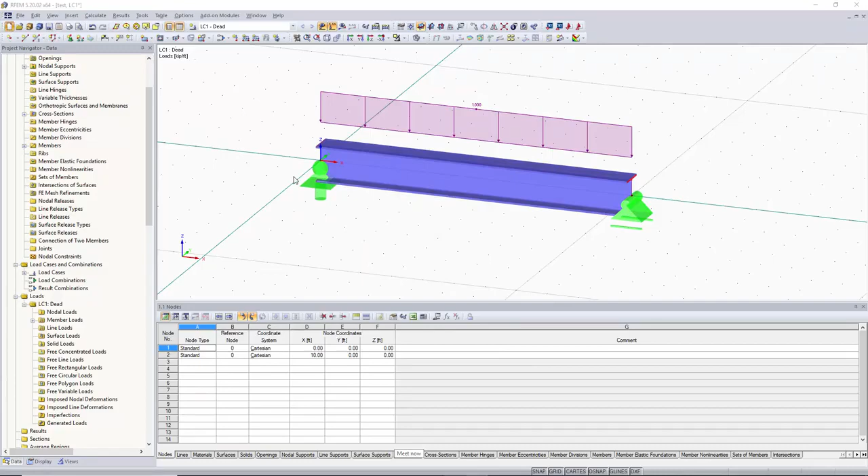To start off, we'll go up into the left hand corner and click on the New Model button. We'll name our model, and then we will click OK. The 7 things we need to determine when creating a new model are nodes, lines, supports, material, cross-section, loads, and then results.

So to start off, we can go up under Insert and go to Model Data and then go to Nodes. Under this drop-down box, we can go to Dialog Box. Within this dialog box, we can set our first node to the origin, which is 0, 0, 0, so we'll click OK. As you can see, our first node was placed.

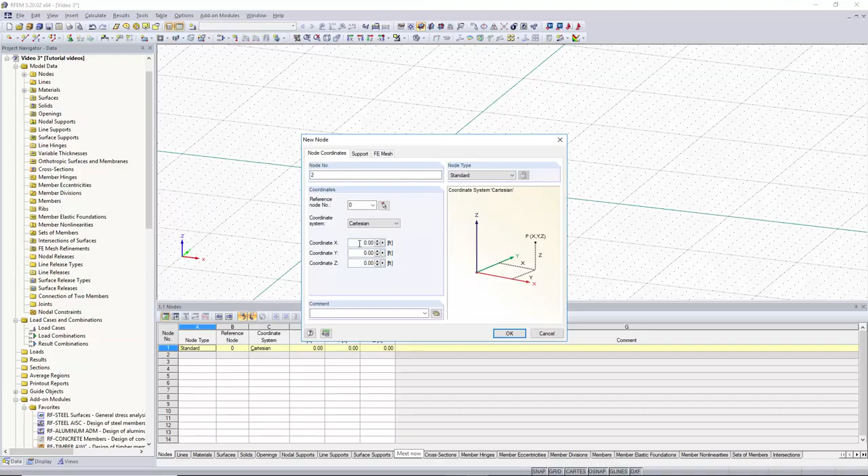We would like to place the next node 10 feet away from this node in the X direction, so we can go back up into Insert, go to Model Data, go to Nodes, and go to Dialog Box again. Then we can go to the coordinate X and input 10 feet. This will put a node in the positive X direction 10 feet away from our origin node.

Now that we have our nodes, we would like to place a line in between these nodes. We can go back up into Insert, go to Model Data, and then we can go to Lines. As you can see, there's a lot of different lines we can select from. For now, we're going to use a polyline, and we're going to click on Dialog Box.

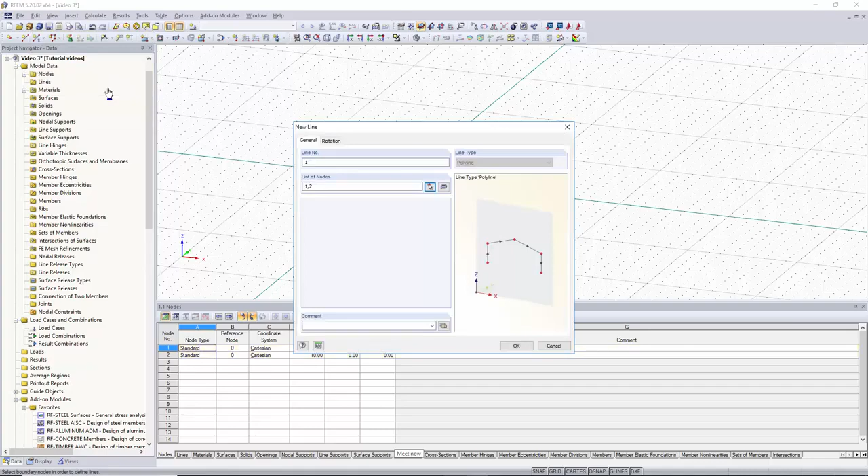Within this dialog box, we will select the nodes we would like to place the line in between. Within this list of nodes, we can either select our nodes graphically by clicking on them and then clicking OK in this box, or we can enter them manually. As you can see, our line was created between our two nodes after clicking OK.

Now that we have our line and nodes, we would like to create a material. As you can see in our project navigator under materials, we already have a material set, but it's blue, so it's not assigned to any certain cross section or member. We will keep steel A992 and move on to assigning a cross section.

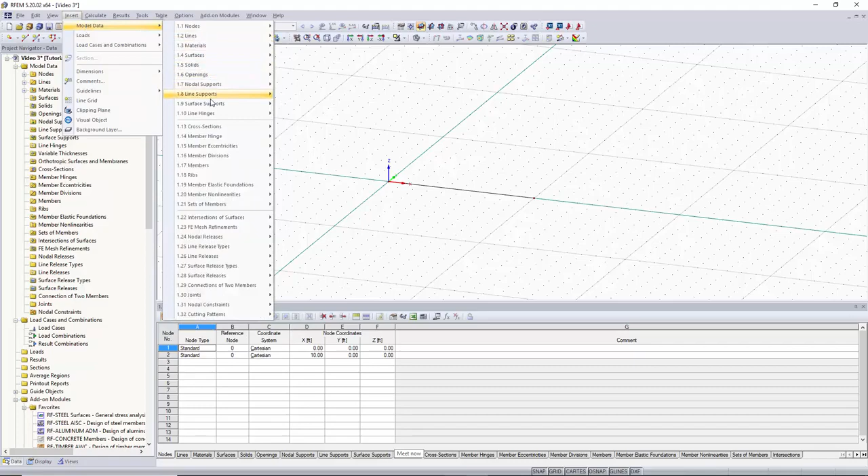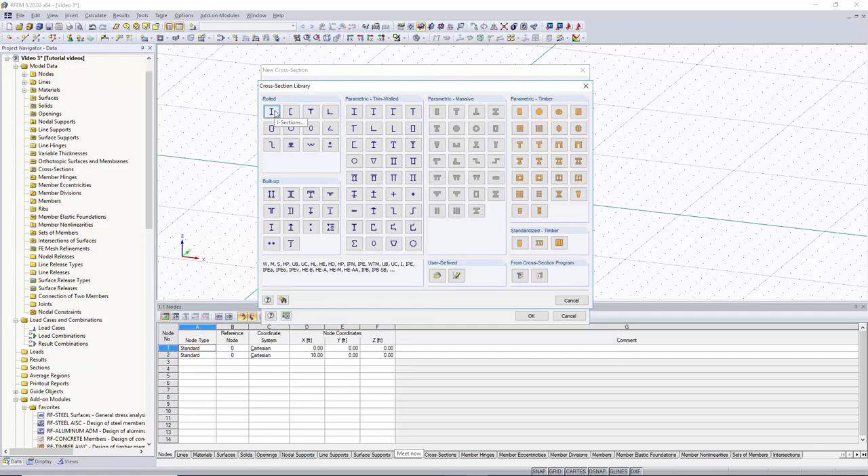Instead of going up into Insert, Model Data, and going to cross section, we can just go into our project navigator and right click on cross section. We can click New Cross Section. A dialog box will pop up where we can input our own cross section properties and create our own cross section, or we can click on the button Import from Cross Section Library, where predetermined cross sections are taken from standards. We're going to do this, and we're going to use an I-beam.

We're going to take an I-beam from the AISC 15, a W shape, and we're going to use a 30 by 326. We'll click OK. Now that our cross section is defined, you can see that it's blue because it doesn't have a member to it, and our material is now black because it is assigned to this 30 by 326 W shape.

Now that our cross section is defined, we can assign it to a member. We can do this within the project navigator as well by going to the members folder and right clicking on members and going to new member. As you can see, we have a dialog box that pops up where we can assign our member to a line. We can go up here to line number, and we can either type in line 1, or we can assign the line graphically by clicking on it and clicking OK within this box.

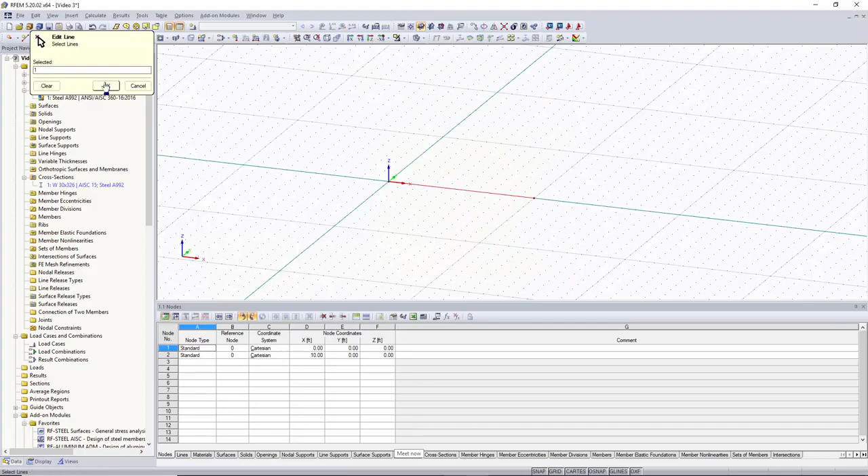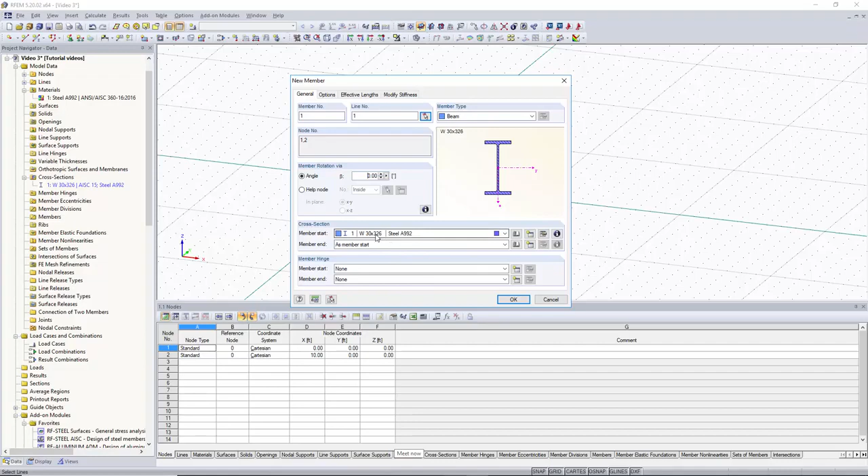Just briefly going over this dialog box, you can see you can select your member type within this drop down box up above the graphical display of the cross section. You can also rotate the cross section as well over here. And below we have our member start and member end cross section, along with member hinges we can assign to the end of the member. For now, we're going to keep the member start as W30 by 326, and we'll click OK.

As you can see, the member has been assigned to our line and our cross section has been rendered. So now we can move on to creating nodal supports for this member. To do this, we could go up to Insert, Model Data, and go down to Nodal Supports and click on Dialog Box. Or I think it's easier to just use the Project Navigator, and as you can see, all of that is organized within here.

And you can just go to Nodal Supports, right click on Nodal Supports, and click New Nodal Support. Here, for our first nodal support, for our first node, we'll unlock the rotation about the Z-axis, and we'll click OK. I forgot to assign the support to the node, so we'll go to Edit Nodal Support, and we'll select our first nodal support, click OK.

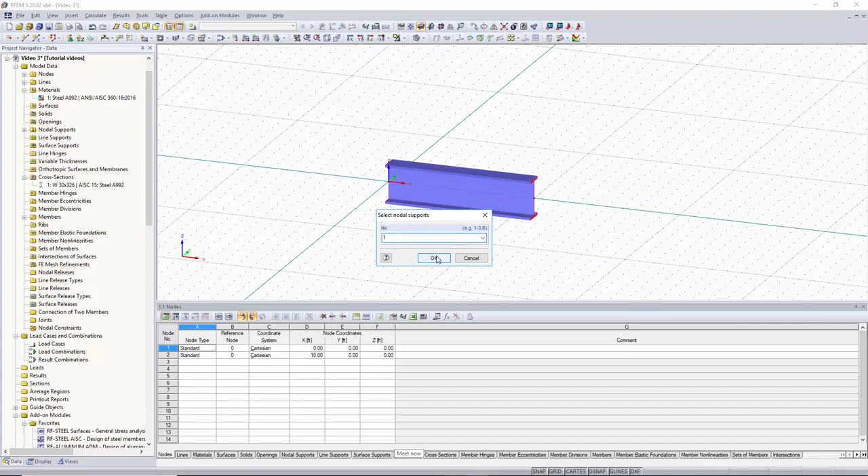The dialog box will appear back up, and up here is where you will assign the support to the node, and we'll input 1 for node 1 and click OK. As you can see, the support was assigned to the first node. Now we want to create another nodal support, so we'll click New Nodal Support.

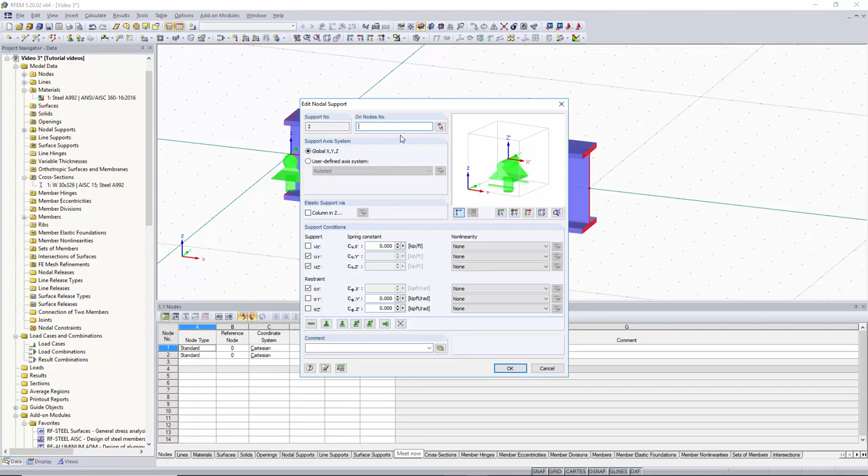And for this node, we want to unlock the rotation about the Z and lock the rotation about the X, so the member doesn't spin about its own axis. And we want to unlock the movement along the global x-axis. We'll assign the support to node 2, and then we'll hit enter. Now you can see that our nodal supports have been assigned to both of our nodes.

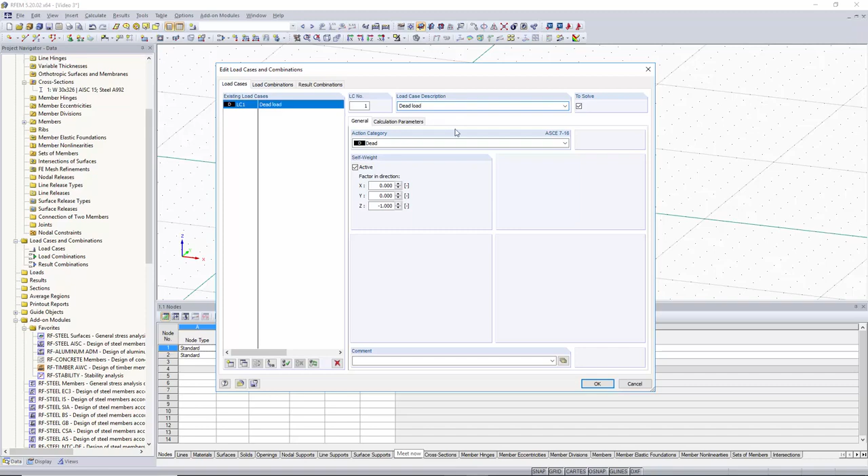Now that our member is fully defined and supported, we can start assigning loads to it. Before we can assign a load, we'll have to create a load case. We can do this by going to our project navigator under load cases and combinations, and we can right click on load case and click new load case. You can see our load case window pops up, and it already created our first load case, and this one will be our dead load. We'll just name this one dead load and keep the self weight active, and then we'll click OK.

Now that our load case has been created, we'll go down to the loads folder and we'll expand the dead load case. Here you can see all of the different loads you can apply to the member. For now, we're going to just apply a member load. So we're going to right click on member load and click new member load. As you can see, our new member load dialog box pops up, and we're going to keep our load type as a force, and we're going to use a uniform load distribution.

For our load direction, we'll keep it as the global true member length and the Z direction. You can also have this be projected, and as you can see, choosing either projected or true member length changes the graphic down here, and that gives you a nice visual representation of what these each represent. For now, we're going to keep it as the true member length. Now we can go down to load parameters and input a load of -1 kip per foot.

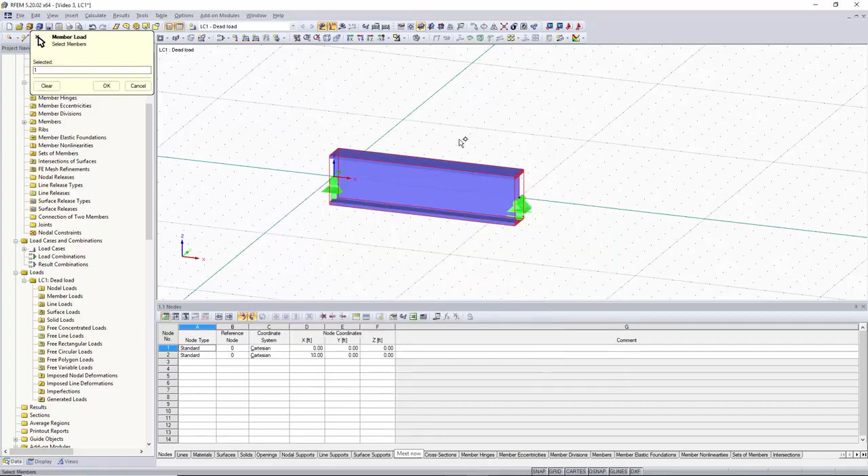We'll click OK. Now we must assign this load to a member, and we want to assign it to our member 1. You can also do this again by clicking on select members, and you can select the member graphically if you'd like. We'll click OK. And now our load is assigned to our member, and you can see this within the graphical area. Now we only want to show the results for this load case, so we'll go up to this button right here called Show Results. We'll click OK and run our results.

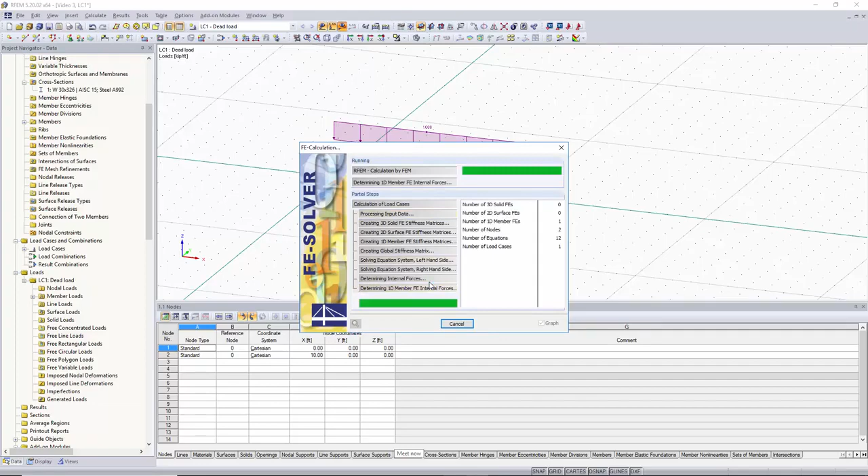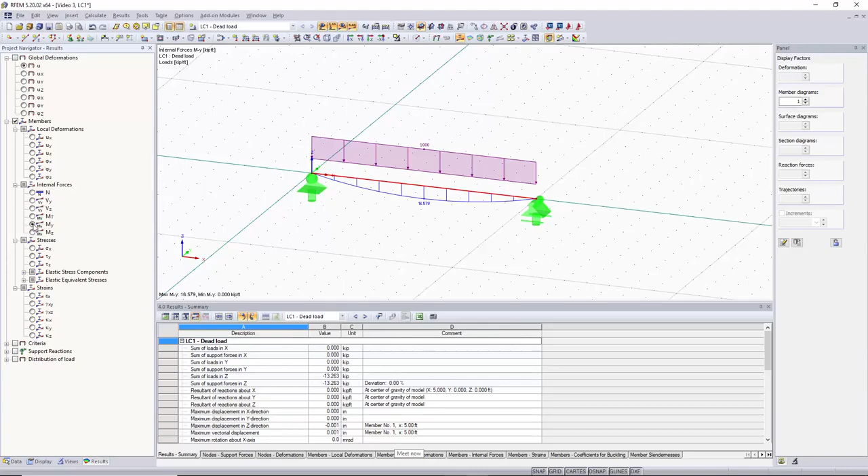Now you can see our results are displayed, and our results tab has come up in our project navigator along with our panel. A future video will be dedicated to going over results more in depth and how to display different results along with colored cross sections and colored results. For now, we can also view the maximum moment by clicking on members and clicking on moment about the y-axis. As you can see, our maximum moment was 16.579 kip feet.

So that concludes this short tutorial, and I hope this video was helpful in demonstrating how to model using only dialog boxes. In the next video, I'll go over how to model only using the graphical area.